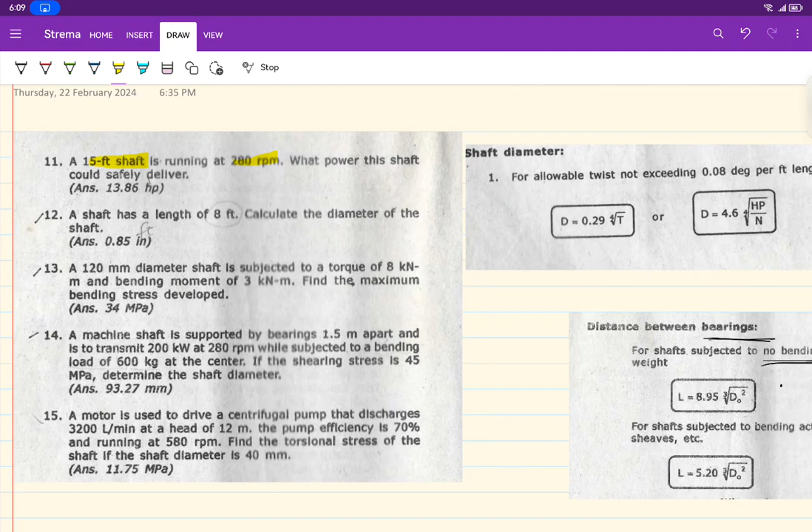Let us answer the following. Number 11: a 15 feet shaft is running at 280 RPM. I think the 15 here is the length. So what power could this shaft safely deliver? You don't have torque. The only thing given is the length of the shaft. How will you solve for the value?

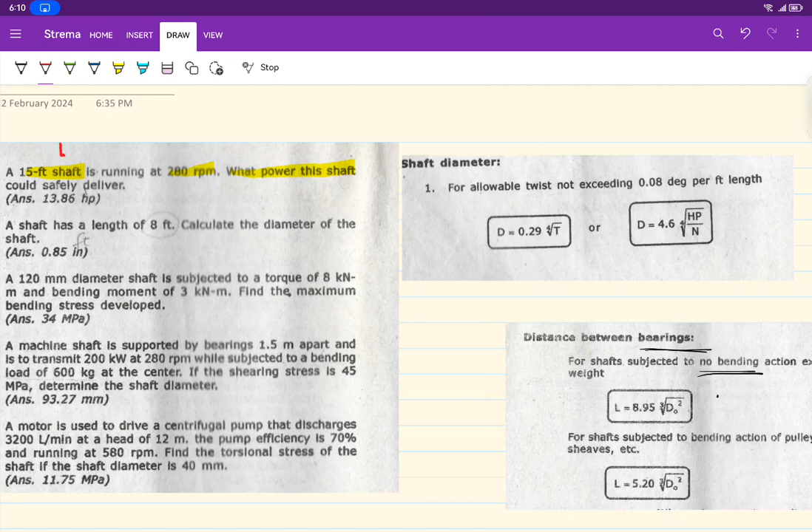If it's 15 feet, is there a 15 feet diameter for the shaft? No, right? Of course, you use common sense there. I think this is L, and this is N. What you're looking for is P. So you can use this as the distance between bearings.

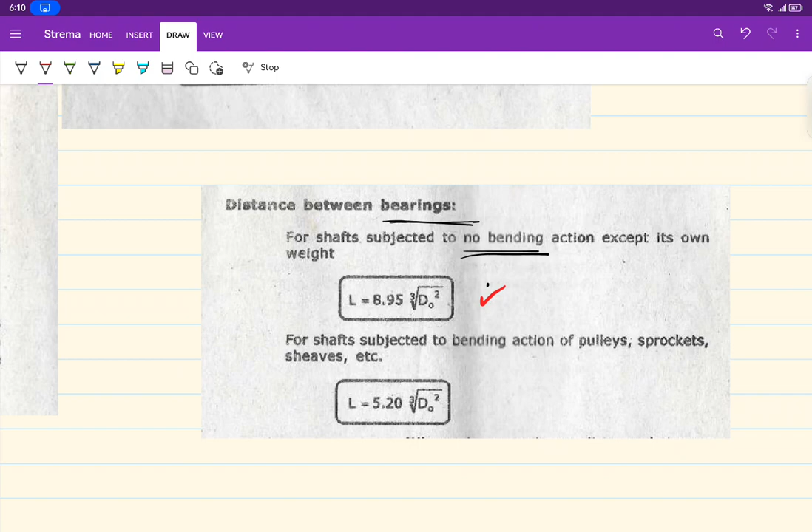For a shaft subject to no load or bending action except its own weight, you can get this formula in order to determine its diameter. And that diameter, you can plug into this formula. Or once you get the torque, you can get it from here - that's Tn divided by factor. So let us see if we can do it.

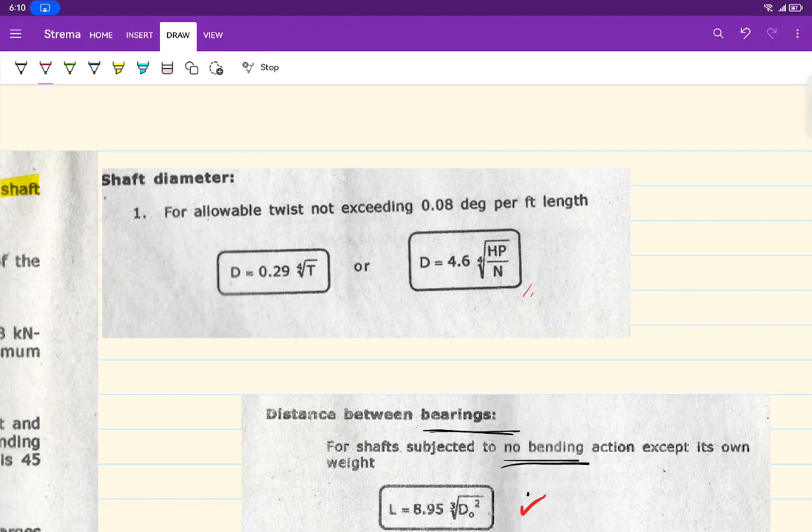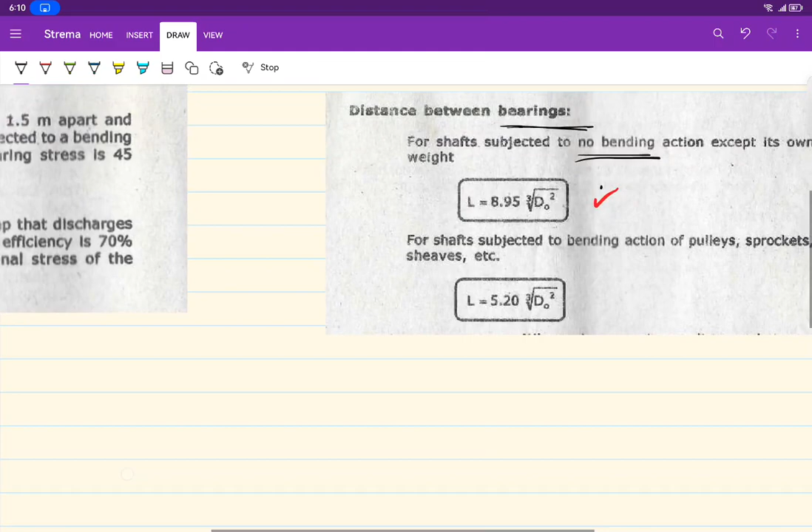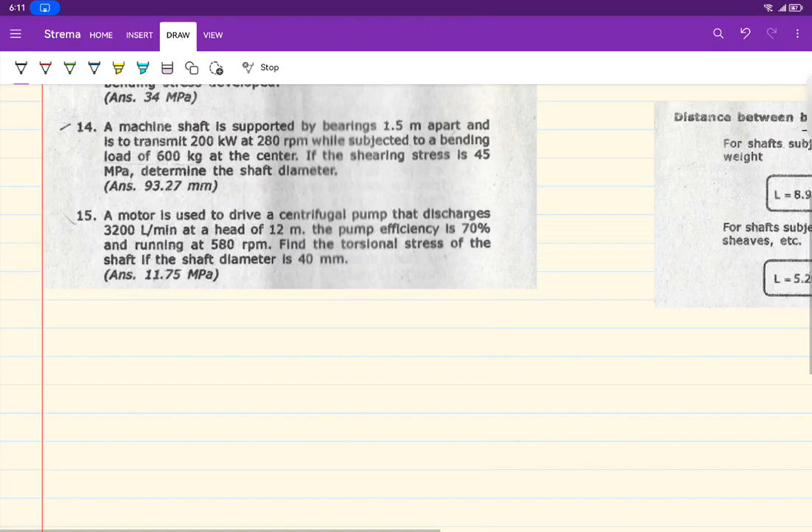For this problem number 11, let me get diameter first. But I want to see you do this in algebra - you can't just shortcut solve it. It's quite simple actually. So what will become of that? Number 11.

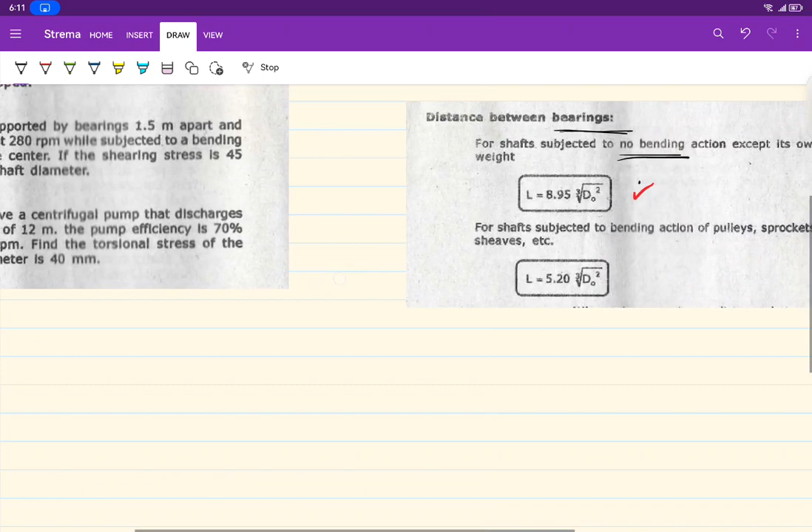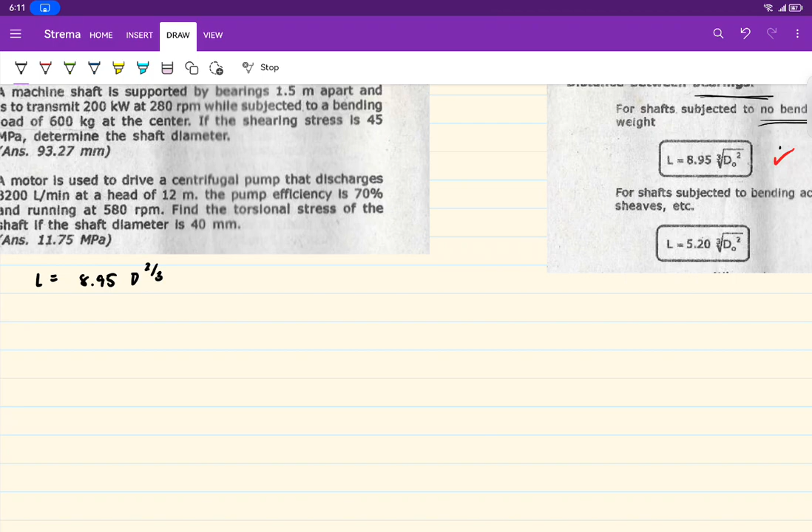L is equal to, for no bending action, that is 8.95, times cube root of DO squared. I can make that DO raised to 2/3 instead, so I can get D, the diameter. I want to determine the diameter, so I can divide both sides by 8.95. This will become D raised to 2/3 equal to L divided by 8.95.

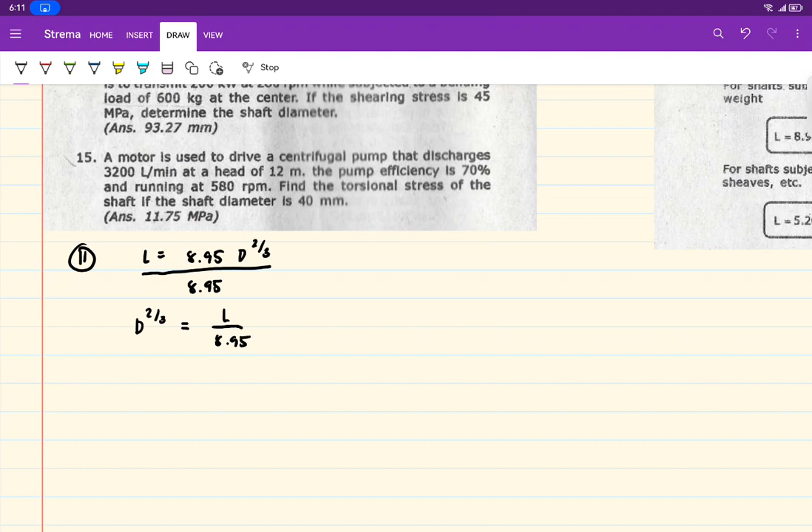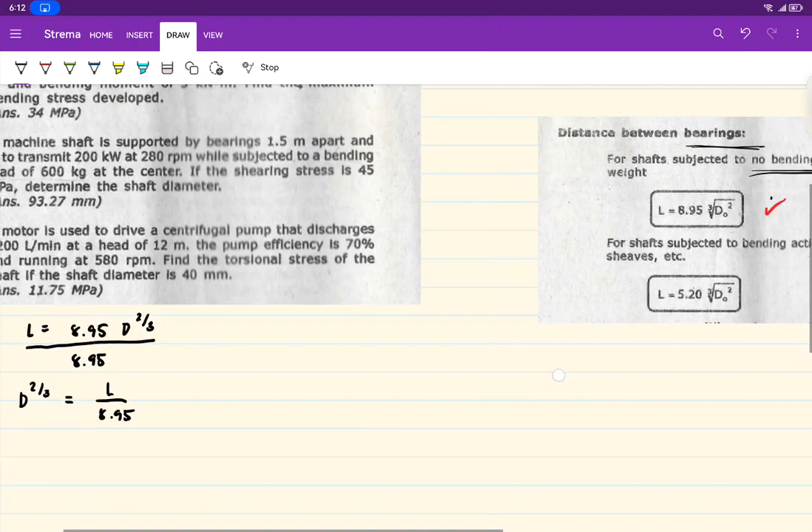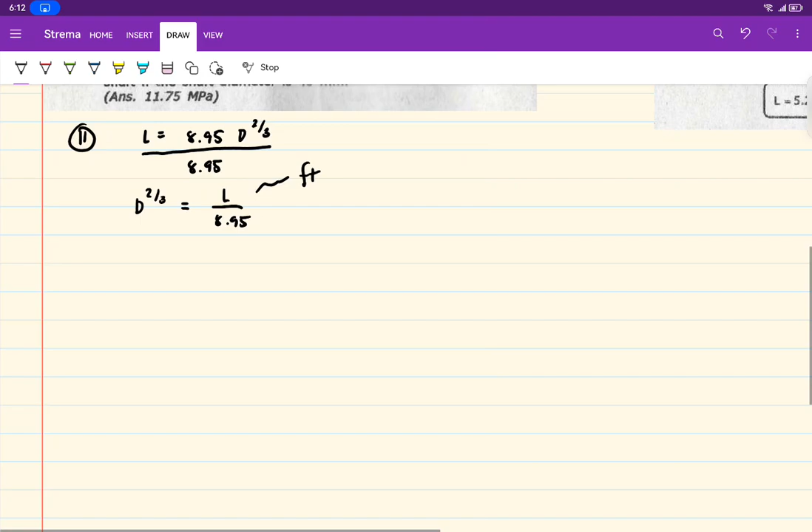The L there should be in feet - I think this is feet, the length. You don't need to multiply it by 12 to get it in feet. Let's find the diameter now - diameter is in inches. To find the diameter, all you need to do is take the cube root.

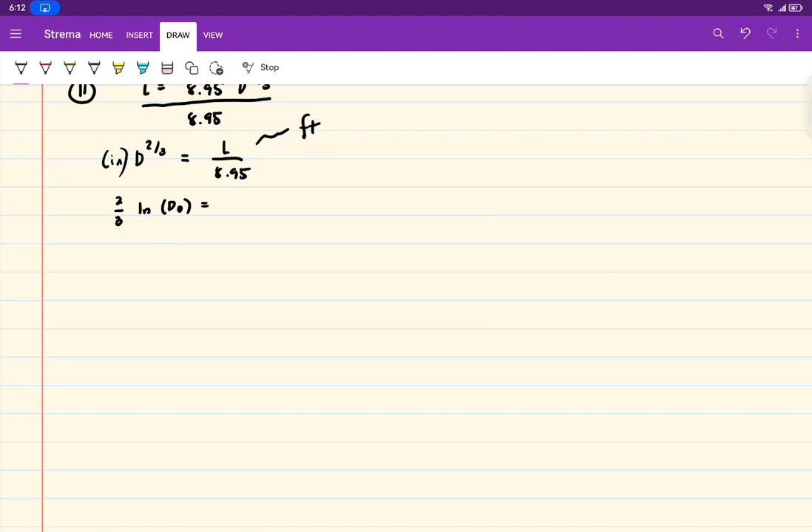So what you'll do is divide both sides by 2/3. This will become ln DO equal to ln of L divided by 8.95, then multiply by 3/2. Or you could just cancel the ln and raise it by 3/2 instead. So this will become DO equal to L divided by 8.95, raised to 3 divided by 2, which is 1.5.

Is my assumption correct? Is it right? So that's 1.5. So I have another formula for DO to get DO. Let me close this for now.

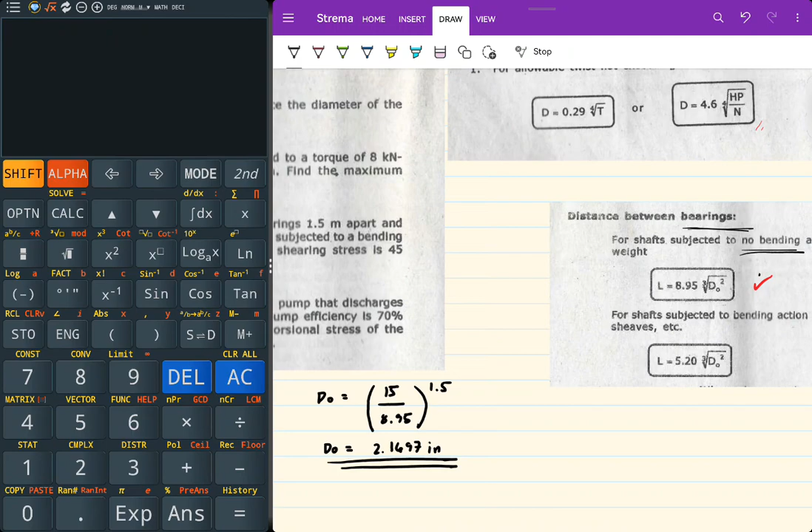You can store this as A. Now you have DO. Sir, I already have DO. I can now get - you can use this for N, you have N, and then go directly to HP. You have another formula there - D is equal to, look at this, that is 4.6.

4.6 fourth root ng HP divide by N. I want to solve for HP. Okay, settle down, madali lang. Algebra lang, i-derive ulit natin.

So, divide ko both sides by 4.6. This will become D divided by 4.6 equal to HP divided by N raised to 1 over 4. Naging exponential siya, naging power yung radical mo.

So what will you do is, ln ko na lang to. Ln ng D divided by 4.6 equal to 1 over 4 ln ng HP divided by N.

And then cross multiply ko ulit. So this will become 4 ln ng D divided by 4.6 equal to ln ng HP divided by N.

Okay, para matanggal natin yung ln, ilipat ko si 4 dito. Gawin kong power ulit si 4. So this will become D divided by 4.6 raised to the 4th power equal to HP divided by N.

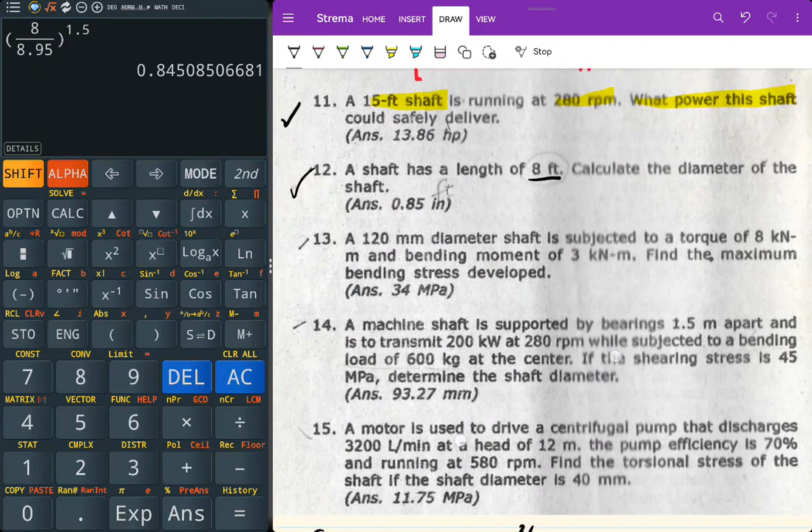Okay, so a 120 mm diameter shaft is subjected to a torque. Binigyan ka ng torque na 8 kN and bending moment.

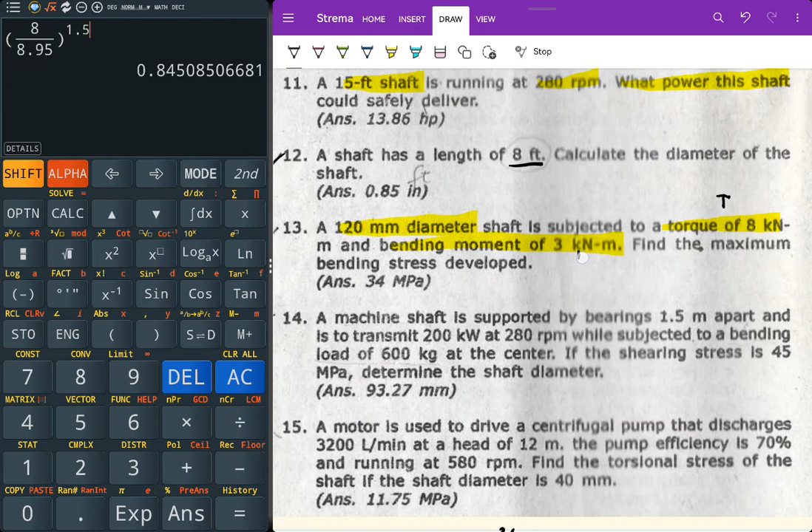So dalawa, torque and bending moment. You have T and M. Find the maximum bending stress developed.

Sir, meron ba tayong mga formula dyan? Yes, there is. Okay, for combined loading na tinatawag. Combined loading, ibig sabihin, you have torque and moment at the same time. Okay, let us apply here.

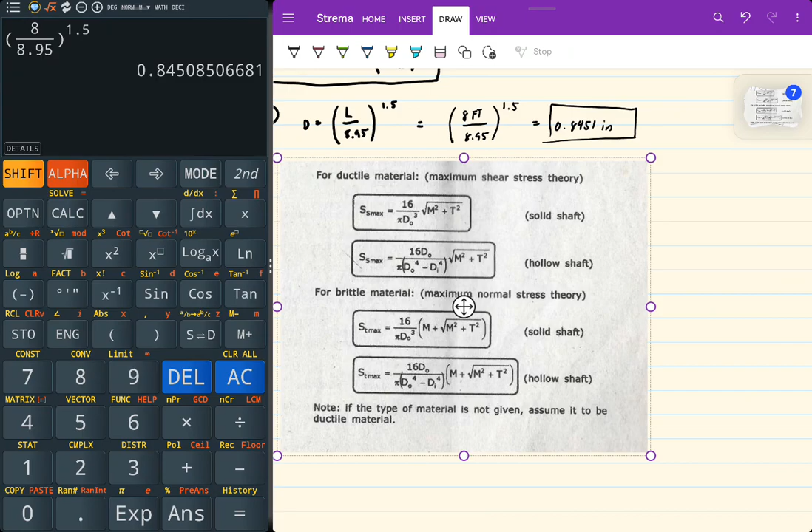Yan. Okay, sabi dyan that for ductile material, again, what is a ductile material? Yeah, a ductile material is anything that you can make into a thin wire. You can stretch it out. Flexible siya.

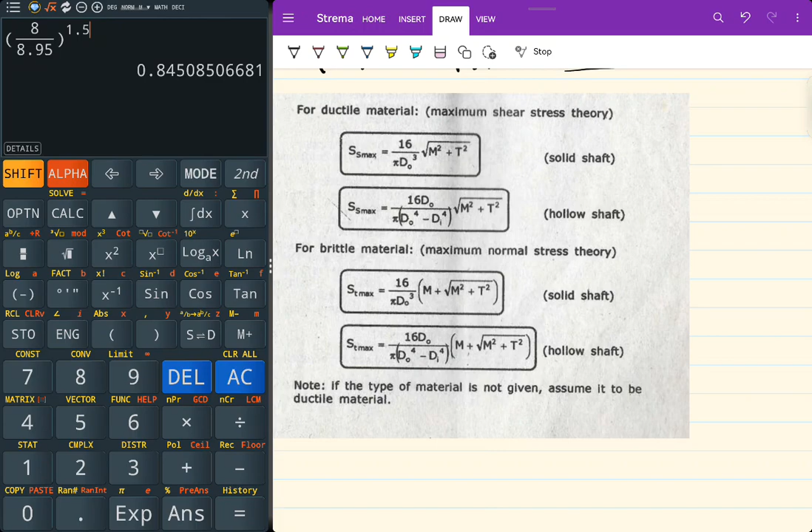So according to the maximum shear stress theory, yung SS max mo is 16T over pi D cubed, di ba? Ang napalitan lang dun sa T, nagkaroon ka ng bending moment and torque.

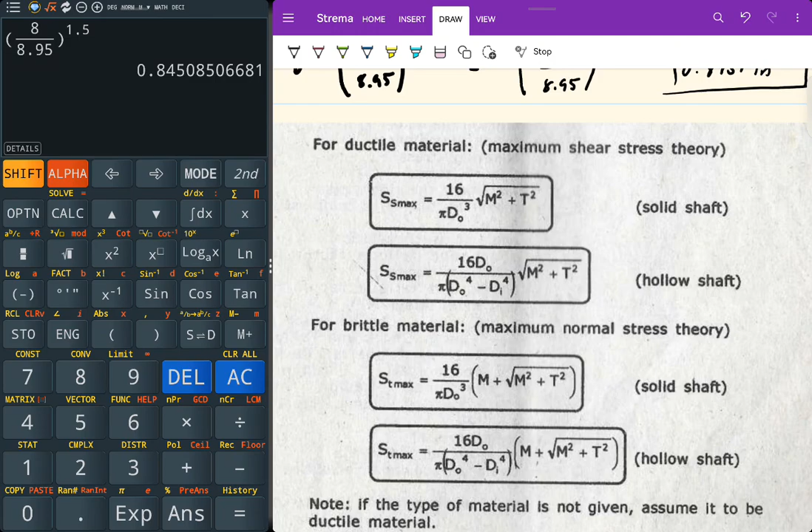Okay, yung T, pinalitan mo nung square root ng dalawa. Parang resultant sila. Itong bending and what? Tingnan natin to. Gawa ka ng triangle.

Your torque is perpendicular to the girth, to your item, that is torque. Your moment is also perpendicular. Torque is tangential, circular. Your moment is within the length, the moment arm. When you bend this, what rotates? The one at the end. So you have a moment, you have a torque.

How will you know the resultant of this? Of course, Pythagorean theorem. Square root of m squared plus t squared. Parang Pythagorean theorem, that's what you replace here for the torque.

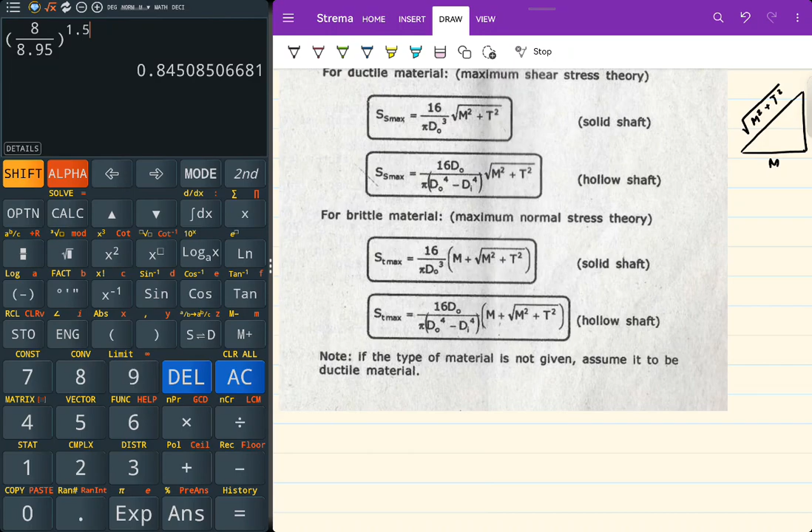Because if it's not hollow, that's a solid shaft, for ductile material, it's 16T over pi d cube. Now what will happen when you have bending and torque together? You just replace with the square root of moment squared plus torque squared.

Next, we still memorize 16T over pi, d to the fourth minus di to the fourth. We replace the torque with the square root of m squared plus t squared, to make it easier to memorize. So for a brittle material, if the material is brittle, the maximum there is the normal stress, while the other one is shear, which is S.

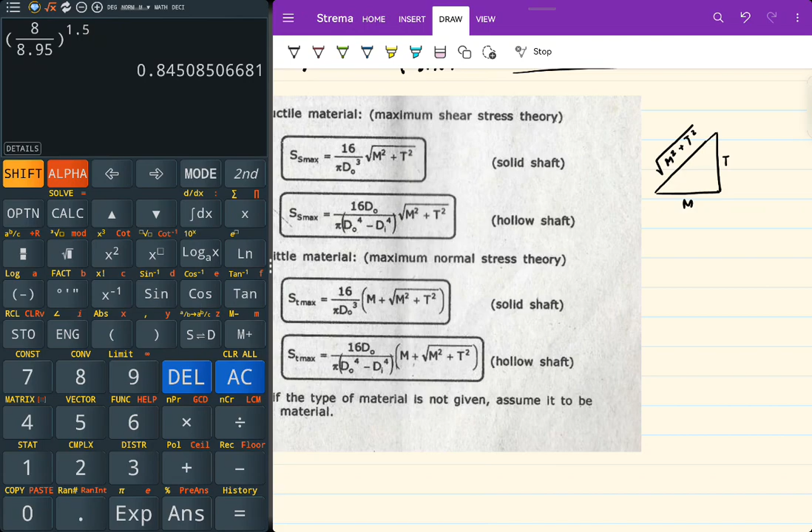When it's normal stress, that's T, or tangential stress. The tangential stress needs M added in front, plus the moment, plus the resultant. That's the tangential, T. Remember that T has M plus the resultant.

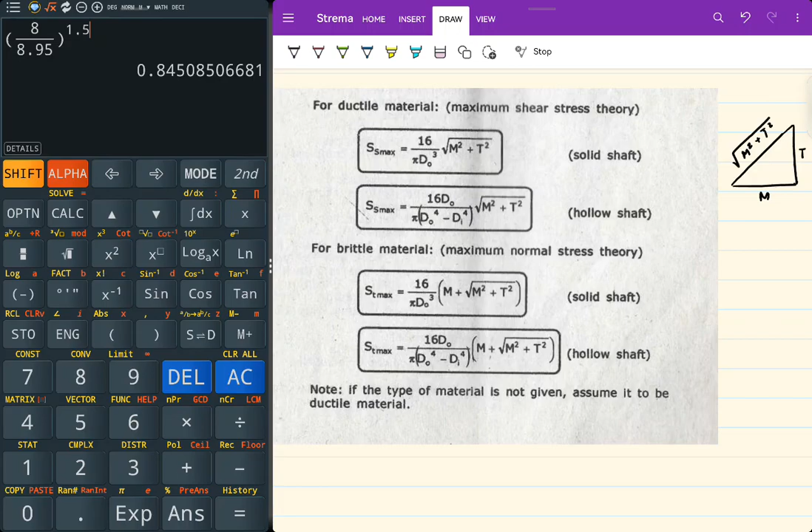If the problem is brittle material, if not given in the problem, you assume it is maximum shear. Now if it's stated in the problem that it's brittle material, you use the one with M in front. If the type of material is not given, you assume it to be a ductile material. Always like that.

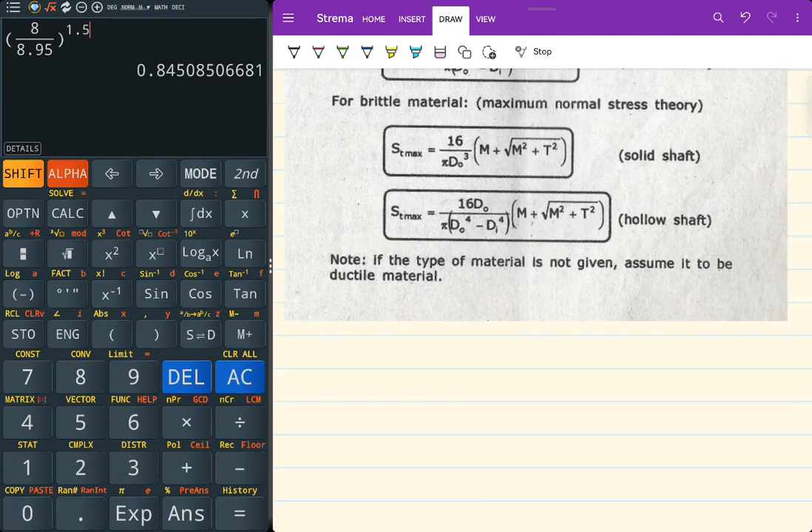So for problem number 13, the maximum bending stress developed. What do we have here? It's given DO, D. Okay, that's a solid shaft, because only one diameter was given. If thickness or inside diameter were given, you can say it is a hollow shaft. So SS max for number 13.

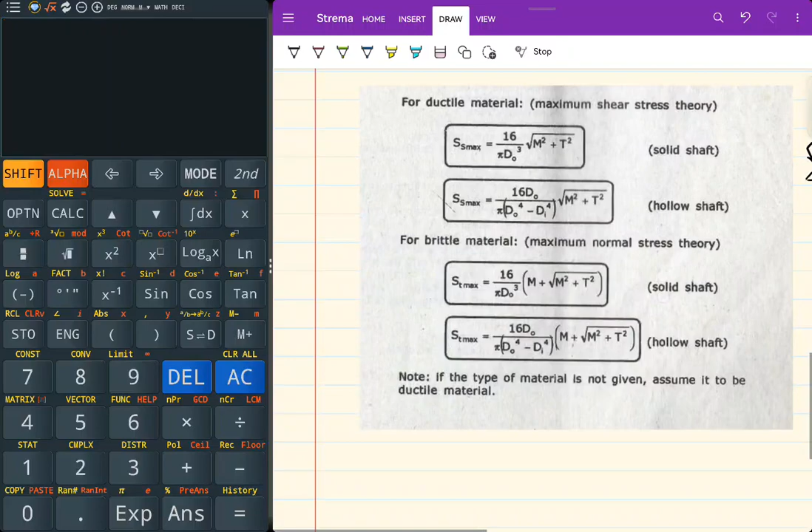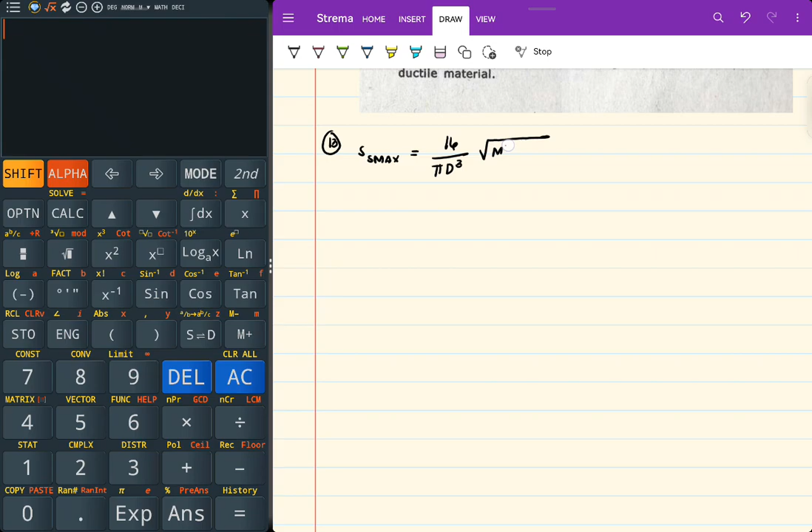SS maximum, maximum shear stress theory: 16 divided by pi d cube, times square root of M squared plus T squared. Remember, the unit inside should be Newton millimeter.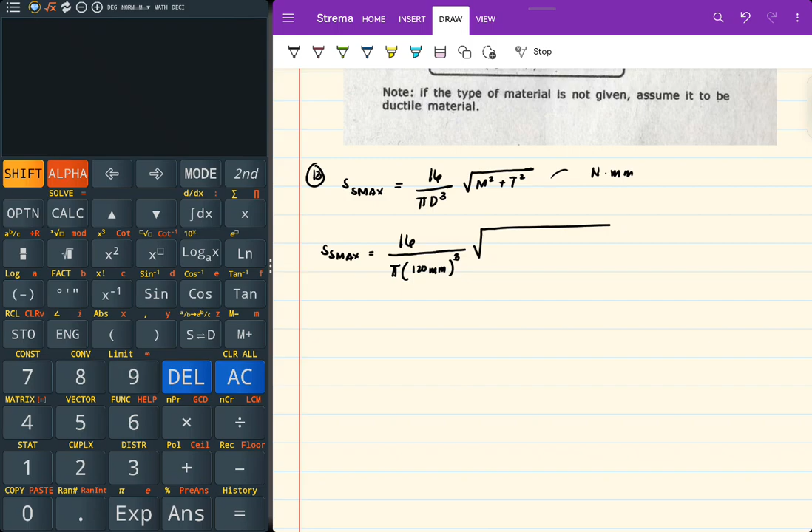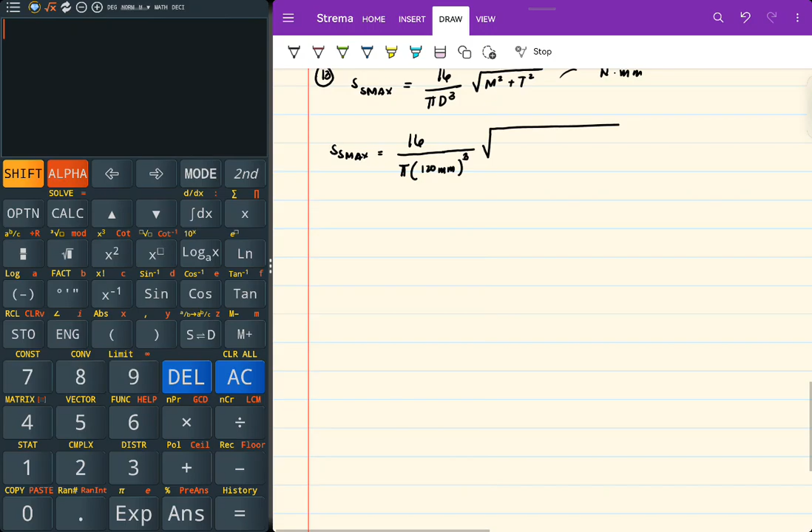SS max equals 16 divided by pi. D cube is 120 mm cube. Multiply by 2. The given values are the moment and torque: the moment is 3 kilonewton meter and the torque is 8 kilonewton meter.

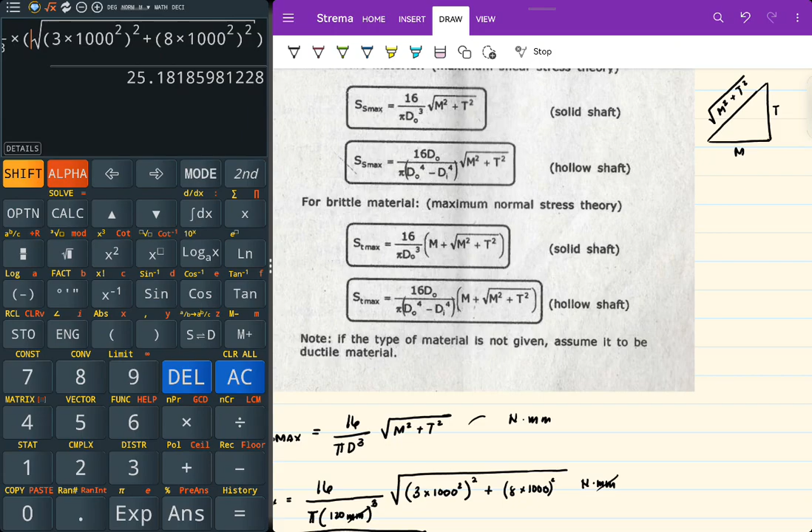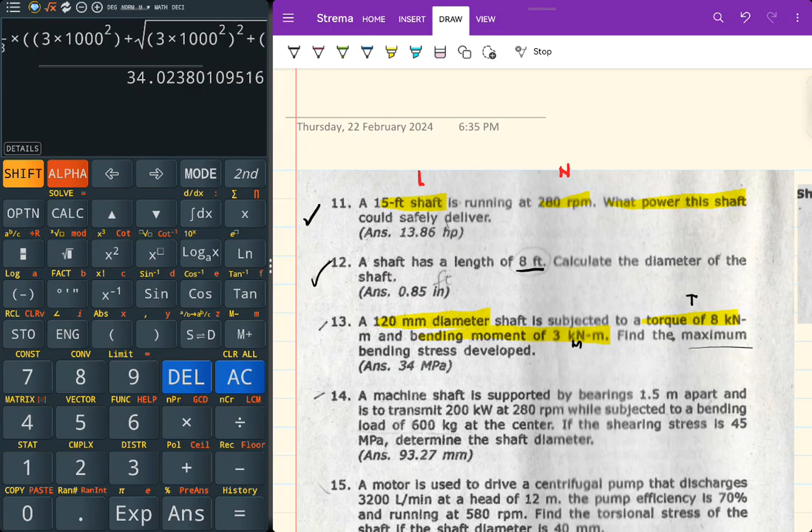So this will become 3 times 1,000 squared, because kilonewton millimeter is quite large, plus the torque term, giving 25.18. So was brittle material mentioned here? Nothing, it just says maximum bending stress, tensile stress, maximum tensile stress. So what was done? We assumed at first that this is for ductile material.

Yung pala ang gusto nyo sabihin is St max. That is 16 over pi d cube, 120 mm cube, multiply to 3 times 1,000 squared plus square root ng 3 times 1,000 squared, naka-squared, plus 8 times 1,000 squared, naka-squared. The unit is Newton millimeter. So ang lalabas dito is 34.02 MPa.

Yun pala yung gusto nyo sabihin. Kaya kahit hindi sinabi sa problem kung ductile or brittle, i-test mo yung dalawa. Makuha pa rin yung right answer. So therefore, the material is brittle.

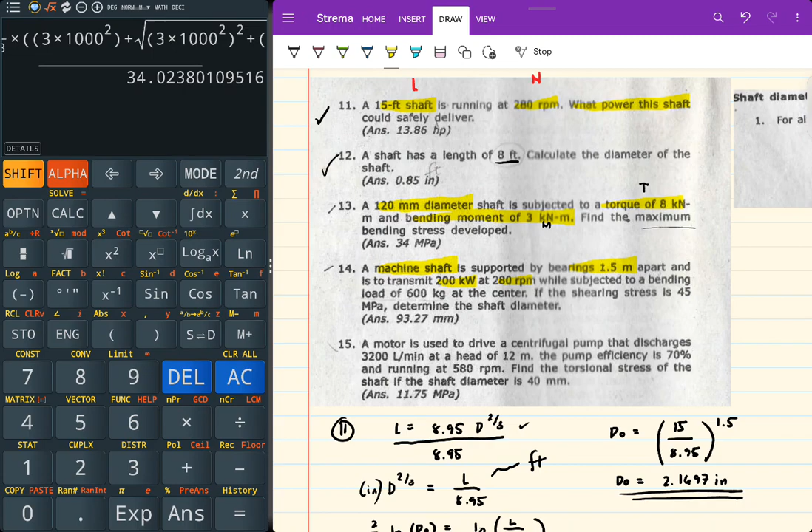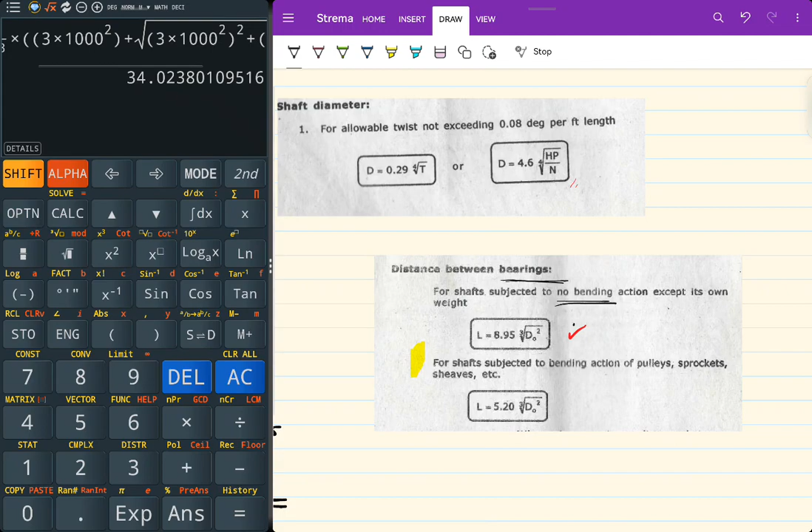Okay, next problem, number 14. A machine shaft is supported by bearings 1.5 meters apart, and is to transmit 200 kilowatts at 280 RPM. While subjected - ito yung keyword - a bending load. So meron kang bending load dito, subjected to bending action. Ayan o, may bending action na daw siya. Check.

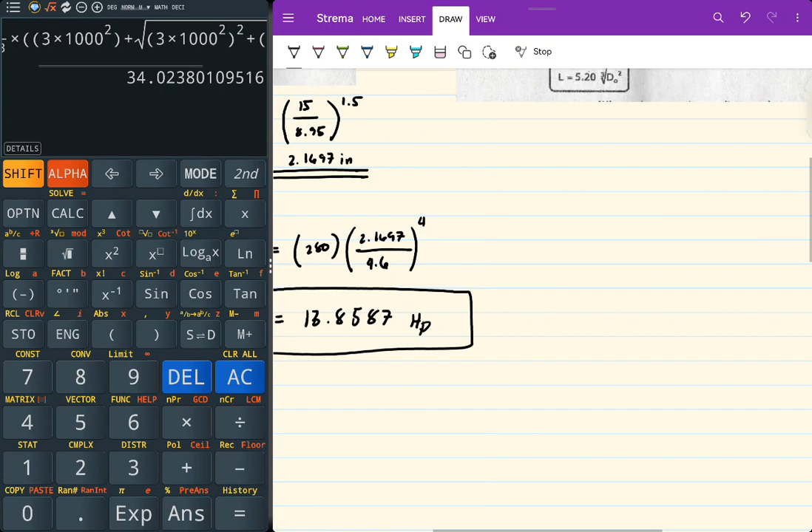Of 600 kilograms at the center, if the shearing stress is 45 MPa, determine the shaft diameter. Oh, direktang formula tayo. Ala natin, mahaba. Maikli lang pala yan. So we use L is equal to 5.20, DO raised to the 2/3 power. Pero empirical yan, so dapat anong gagawin natin?

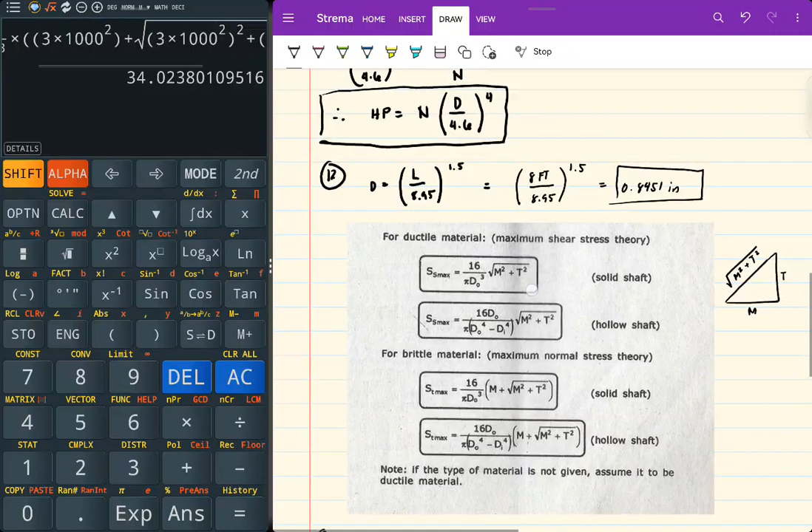Dapat i-English natin. Correct. So for number 14, L is equal to 5.20, D raised to the 2/3 power. Ano yung L natin? Okay, derive ulit natin. L divided by 5.20 equal to D raised to 2 over 3. O, direkta na daw. D is equal to L divided by 5.20 raised to 1.5. Ganun din, same lang, sinortcut ko na.

So D is equal to - yung L natin is 1.5 meters times 3.28 feet every meter, divide by 5.20 raised to 1.5. Okay, answer the value. This is 1.5 times 3.28 divided by 5.20, raised to 1.5. So the answer is 0.9203 inch. Check nga natin kung tama yung sagot.

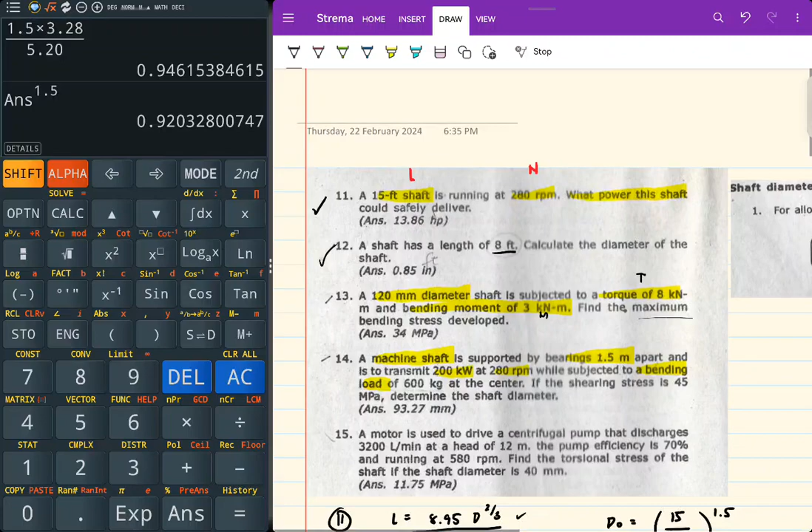Moment of truth: 93.27, while subject to a bending load of 600 kg at the center. Ano kayang binasihan niya dyan? Hindi pwede yung natin, hindi pwede yung ating alam. Sir, meron pa akong isa dito na pwede kong gamitin. Yes, the shearing stress. Ano ba yung shearing dyan? Shear stress is equal to 16T over pi d cube.

Okay, you have exceeded yung ating empirical formula. So ibig sabihin, hindi ito yung tamang sagot. So huwag natin i-box. Not the proper answer, not this one. Wrong answer. So hindi pala kahit indicated sa problem na with bending moment, diretso ka na kagad.

So meron kang process dyan. Kunin mo muna si torque kay power, Tn divided by factor. Okay, do this. Tn over factor. Yung isang formula is SS, 16T over pi d cube. Ang kailangan ko d cube. So reform ko ito ng torque.

That is power times factor, divide by N. Ito naman, d cube kailangan ko. D cube is equal to 16T over pi SS. Pasok ko na si torque dito. So d cube is equal to 16 times power times factor, divide by N pi SS. So pwede ko nang isimplify by adding the cube root.

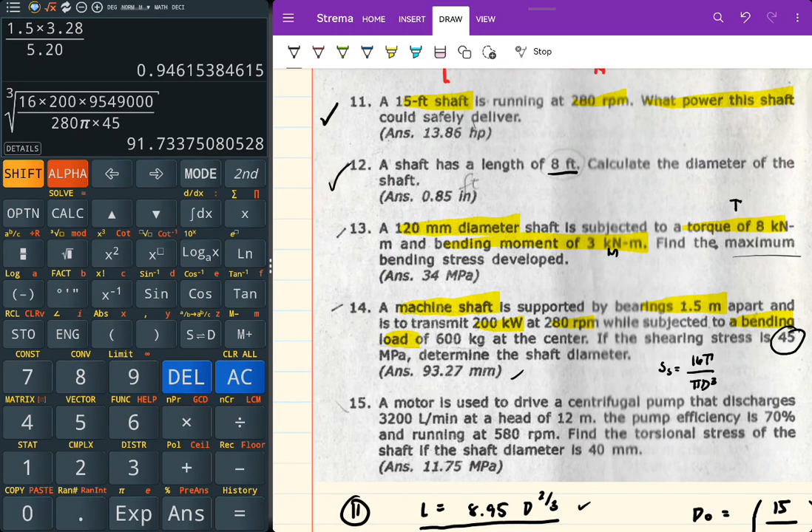Is it close enough to the value? Yes. Akala natin doon tayo sa maikli na part. Sometimes sa board exam, parehas may sagot yun. Para saan ba dinidesign yung shaft? You are designing your shaft in order for it, number one, to withstand yung torque application, which will yield yung angular deflection. And number 2, you are designing the machine member because it can withstand yung stress. Hindi parating empirical, you have to check it.

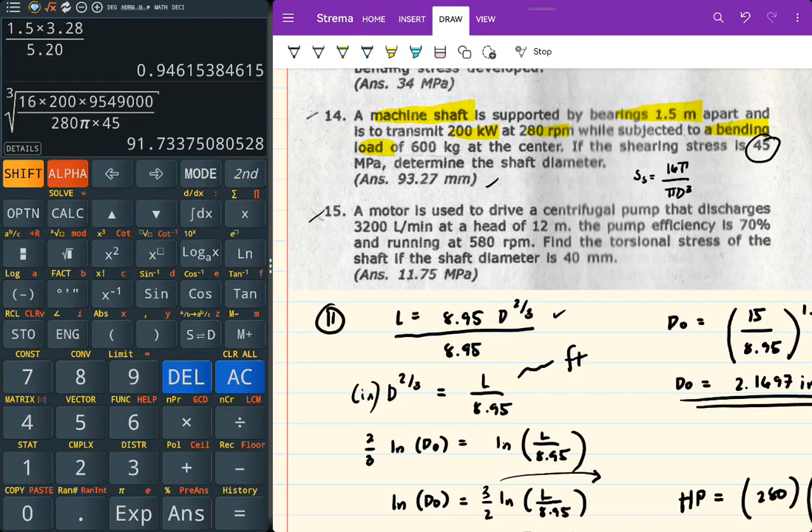So next problem, number 15. A motor is used to drive a centrifugal pump. Meron kang given na Q - o, fluid machinery, so you have Q - at a head of 12 meters. O, binigyan ka ng head, may H ka agad dyan. And pump efficiency is 70%. So ibig sabihin, if the pump is 70% efficient, yung motor power mo is 70% lang yung dinideliver niya sa pump.

Okay, tama ba? Kung nag-produce ako ng 100 kilowatts na power para paganahin yung pump, yung output ng pump is 70% na lang, kasi may losses, meron kang friction losses, di ba? And running at 580 RPM, find the torsional stress of the shaft if the shaft is 40 mm.

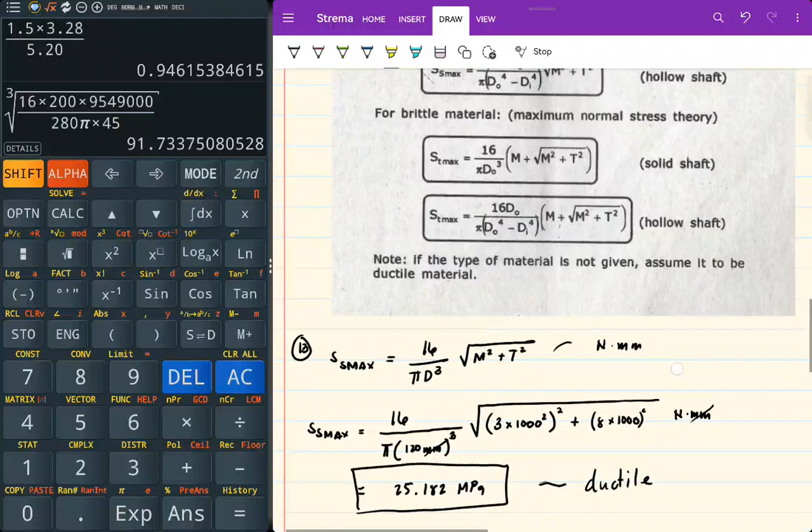Okay, lista natin. Very basic itong number 15. Anong binigay sa'yo? Yung power, motor power is equal to gamma Q H divide by efficiency ng pump.

Tama? On the shaft power, i-drawing natin para naintindihan ng ating mga engineer. Okay, this is your motor. Motor power, tapos meron kang shaft dito. Umiikot yung shafting mo.

So meron ka dyan motor power, umiikot yan, tapos dadalhin niya dito sa bomba. O, yan, bomba yan. Meron kang pump power na idadala. So yung motor power na yun is actually the shaft power, which is T N divided by factor.

Tama? Meron tayong gamma, meron tayong Q, meron tayong H, meron tayong EP. Wala tayong torque, meron tayong N. Yung factor, basic yan. Anong hinanap natin? Hinanap dyan is the torsional stress. So ang torsional stress ko is 16T over pi d cube.

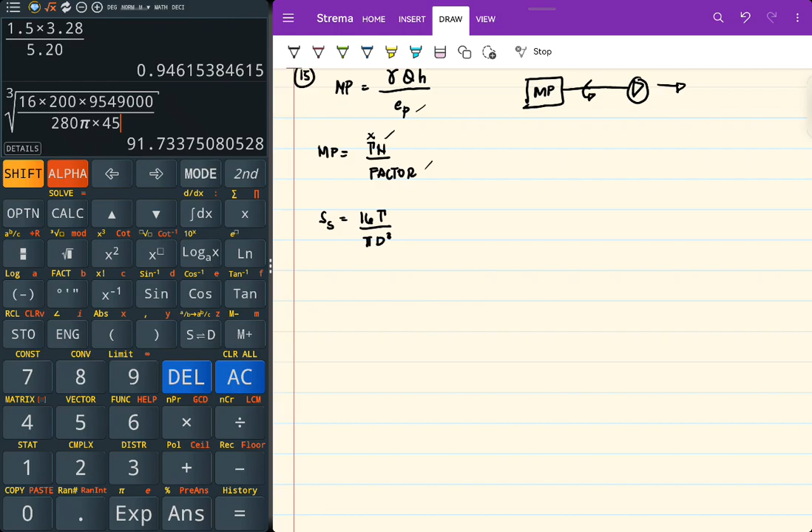Parang naiisip nyo ba, naiisip ko, gusto kong isahin na lang yung calculation. So let us see. Dito muna tayo magsimula. Pagtapatin natin yung dalawang motor power. Ang dalawa. So gamma Q H divided by EP equal to T N divided by factor.

Definitely, ito lang ang wala ko, yung torque. So I have to reform the equation in terms of torque. Torque is equal to gamma Q and H times factor.

Sir, ang bilis mo naman mag-solve. Lagi ka nang nag-algebra, so you should live like this. Okay, kung hindi man kaya, maghimay-himay ka, kaya lang matagal pag hindi may-himay. Diba parang kumakain ng ano, kumakain ka ng bangus, hinihimay-himay mo muna bago mo kainin, kumakain ka ng hipon, hihimay-himay mo muna. Matagal yun, busog na yung nasa paligid mo, ikaw naghihimay ka pa rin.

So what will happen is, ganito yung magandang recommendation ko sa inyo para tumalas yung memory nyo sa pag-solve. Gamma QH yung nasa ibaba, pump efficiency times N. Okay, nakakuha na ako sa torque.

Yan, kailangan ko yung SS, shearing stress of the shaft. Ayun, pasok ko dun yung torque. So this will become SS is equal to 16 times gamma times Q times H times factor, divide by pi d cube EP times N.

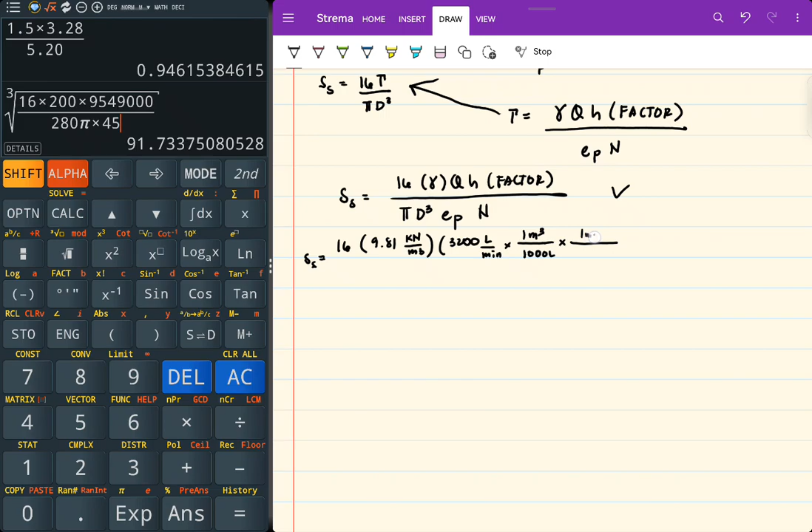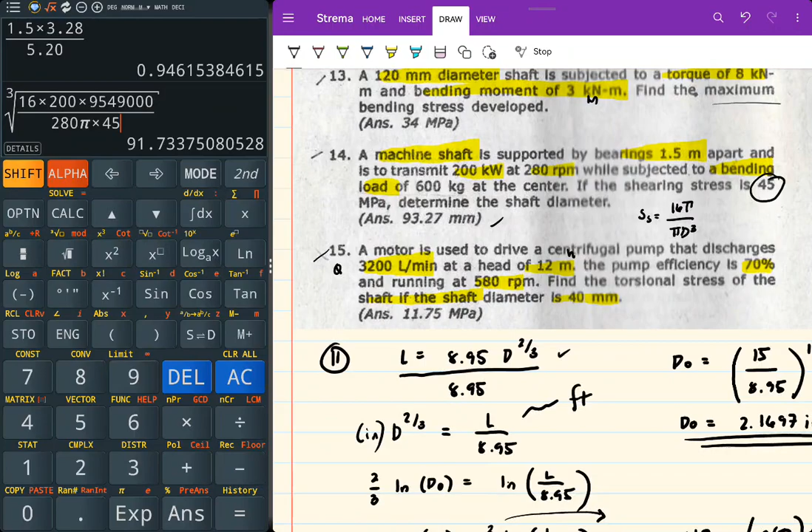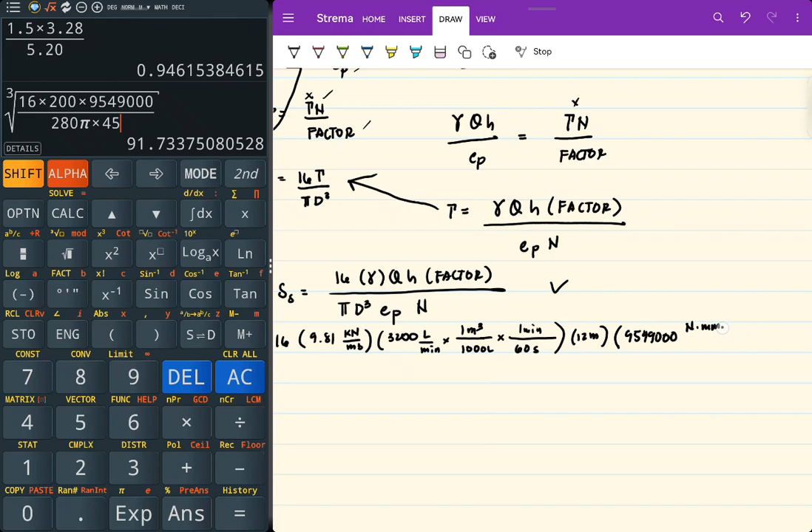So 1 minute divide by 60 seconds. O, tapos na ako sa conversion doon. Yung isa, next. 12 meters, 580 RPM. So Q is okay na, 12 meters, times factor, 9,549,000 Newton millimeter RPM every

kilojoule every second, kilowatts yun di ba? Divide by pi times diameter of the shaft. Diameter of the shaft is 40 mm. Cube. Efficiency of the pump, 0.7 or 70. Tapos 580 RPMs. Ang kailangan ko is Newton every millimeter squared.

So i-cancel ko nga yung 1 millimeter dito. Naging 2 na lang to. Kaya yung RPM, kinancel ko na. Liters, liters, minutes, minutes, yung seconds, na-cancel na. May meter cube pa dito eh. Meter cube, meter cube. Meter, kilonewton meter is kilojoule.

Okay, ano natira? That is Newton every millimeter naka-squared. So MPa na kagad siya. Okay, naka-MPa na kagad. So isang pindutan sa calculator, 16 times 3,200, lahat ng sa taas ha, lahat na nasa baba sa baba. Yun natin, times 12, para hindi ka nalilito, times 9,549,000, lahat na nasa baba, tingnan nyo. Si 1,000, si 60, 1,000 times 60 may pi times 40 naka-cube, times 0.7 times 580. Very basic.

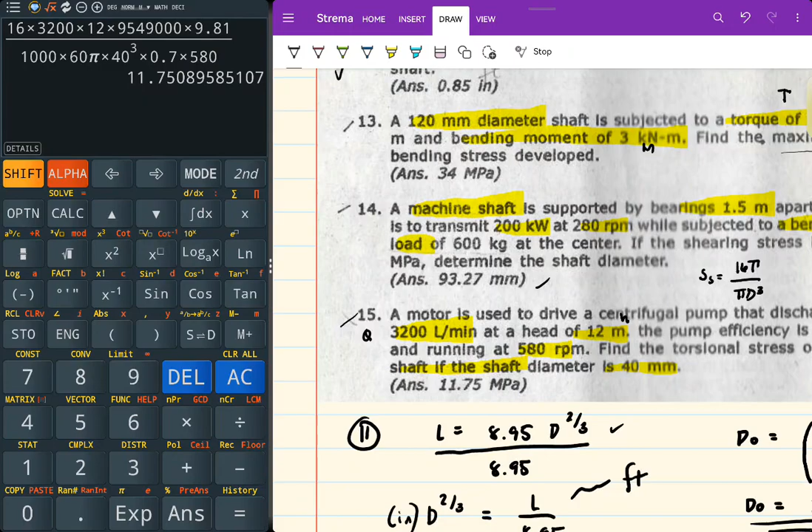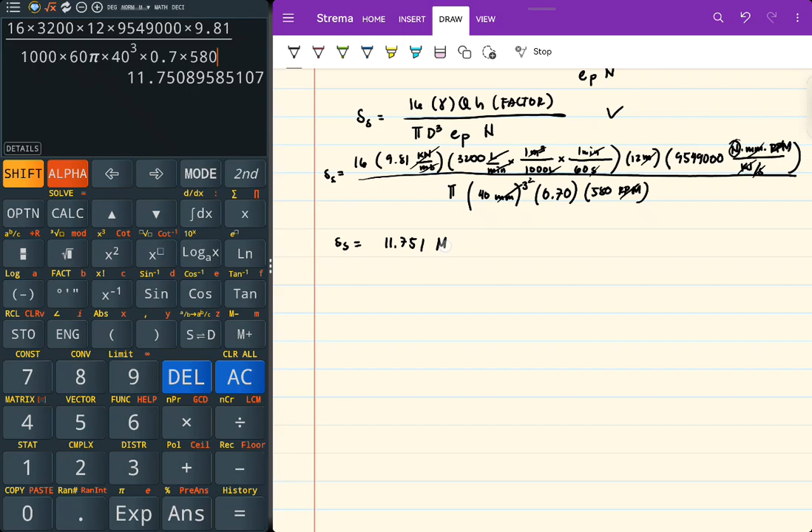Ano yung stress na shaft? 11.75 MPa. Basic, okay? So SS is equal to 11.751 MPa. Check. Basic yan, okay?